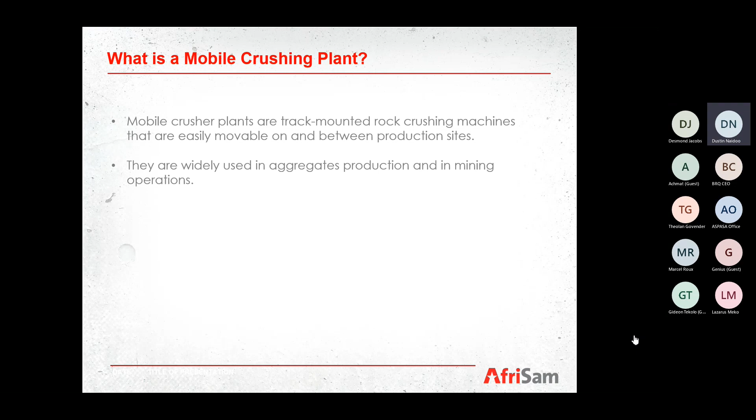Mobile crushing plants are track-mounted rock crushing machines that are easily movable on and between sites. These machines run on tracks similar to excavators, and can easily be moved around a site and between sites if needed for other operations. They are widely used in aggregate production and mining operations. Mobile crushers can replace stationary crushing systems, which reduces the need for hauling and thus cuts operational costs.

What that means is if your quarry pit allows it, you can have your mobile plant set up into the pit itself and not have to haul material from the quarry pit to the operating area. Mobile crusher plants are typically powered by hydraulic systems, where hydraulic pumps are driven and coupled to a diesel engine, which then runs the rest of the units.

Let's look at some of the units typically used in the plants or in the process. Some units are electrically powered, relying on external electrical power from a mobile generator.

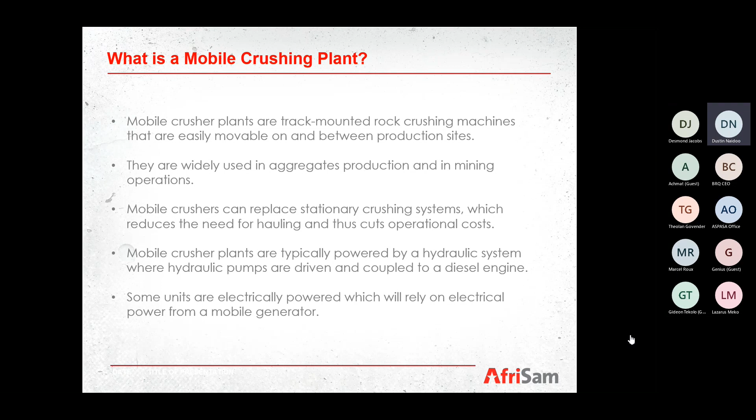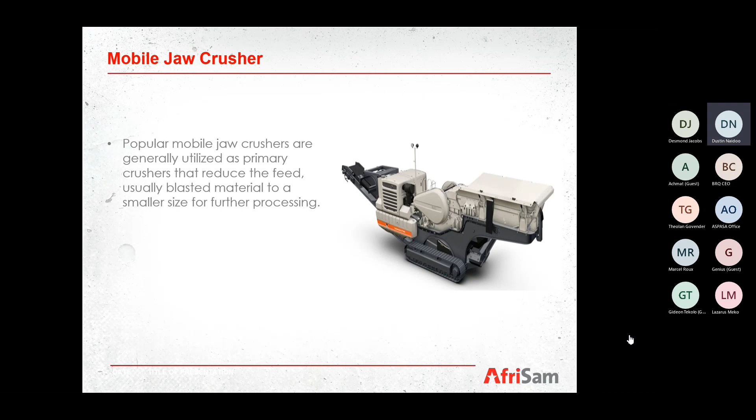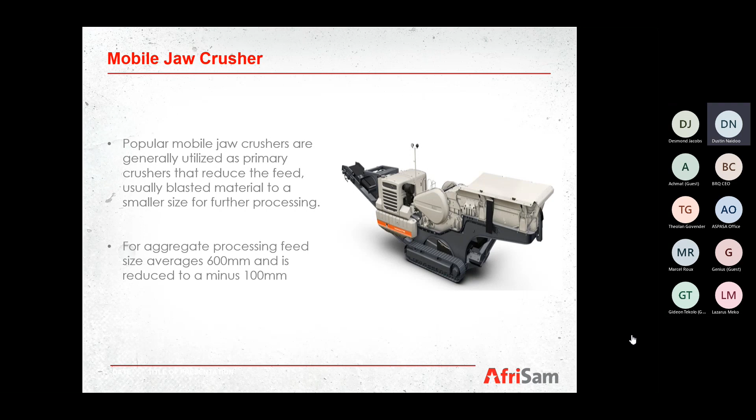Looking at the units available, at the beginning, in your primary side of the process, you have a mobile jaw crusher. Popular mobile jaw crushers are generally utilized as primary crushers that reduce the feed, usually blasted size material, to a smaller size for further processing. For aggregate processing, feed size averages 600 millimeters and is reduced to a size of minus 100 millimeters.

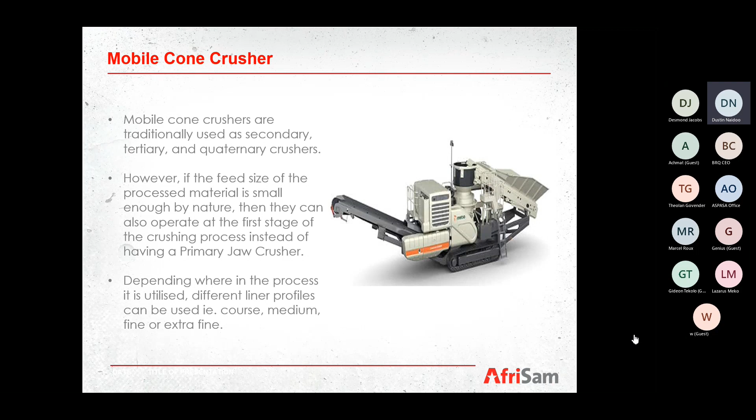Usually in front of that, we'll have a mobile cone crusher. Mobile cone crushers are traditionally used as secondary, tertiary, or quaternary crushers. However, if the feed size of the processed material is small enough by nature, they can operate at the first stage of the crushing process instead of having a primary jaw. Depending on where in the process it's utilized, different liner profiles can be used - coarse, medium, fine, or extra fine - depending on the specification of the material required.

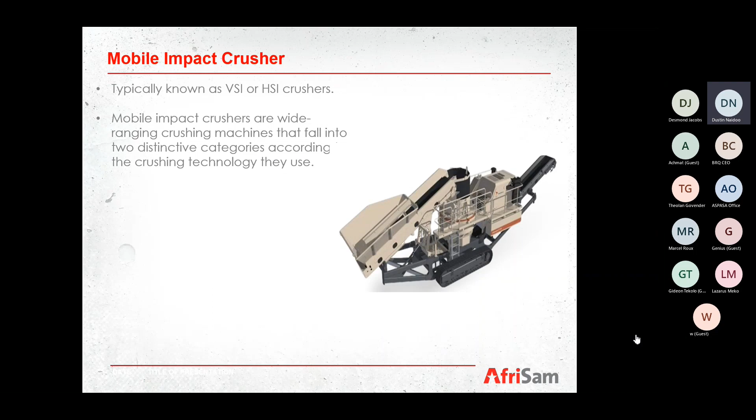Next up, we have a mobile impact crusher, typically known in the market or industry as HSI or VSI crushers. Mobile impact crushers are wide-ranging crushing machines that fall into two distinctive categories according to the crushing technology they use: mobile HSI crushers, having a horizontal impact crushing unit, used as primary, secondary, tertiary, or quaternary crushers; and mobile VSI crushers, equipped with a vertical shaft impact crushing unit, extremely efficient in the last stage of the crushing process, precisely shaping products by reducing the flakiness index.

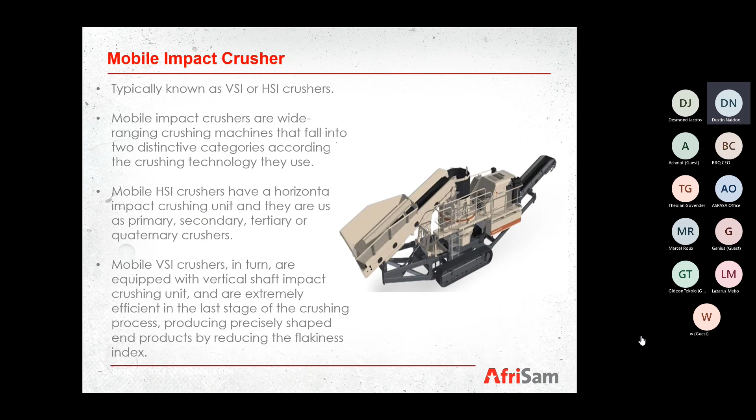Next, we have mobile screening plants.

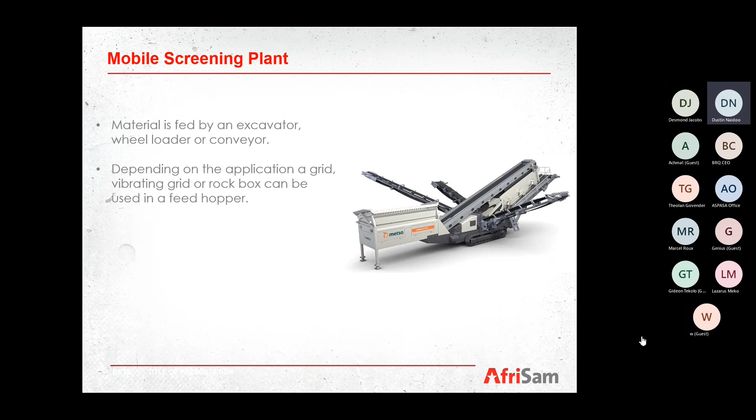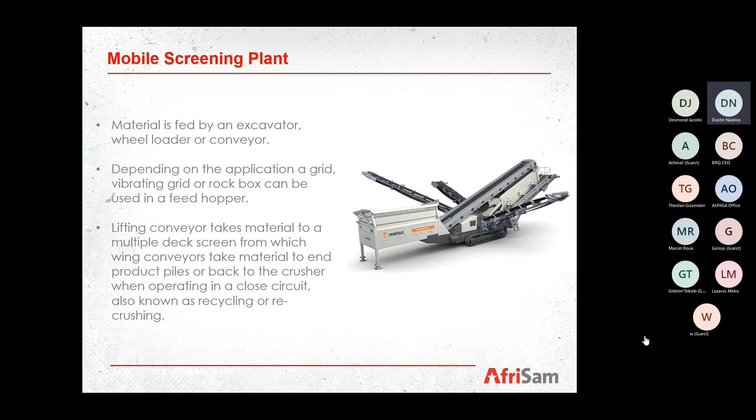Material is fed by an excavator, wheel loader, or a conveyor if used in the full train. Depending on the application, a grid, vibrating grid, or rock box can be used in a feed hopper where material is fed into. The lifting conveyor then takes material to a multiple deck screen from which wing conveyors take material to end product piles or back to the crusher when operating in a closed circuit, typically also known as recycling or recrushing.

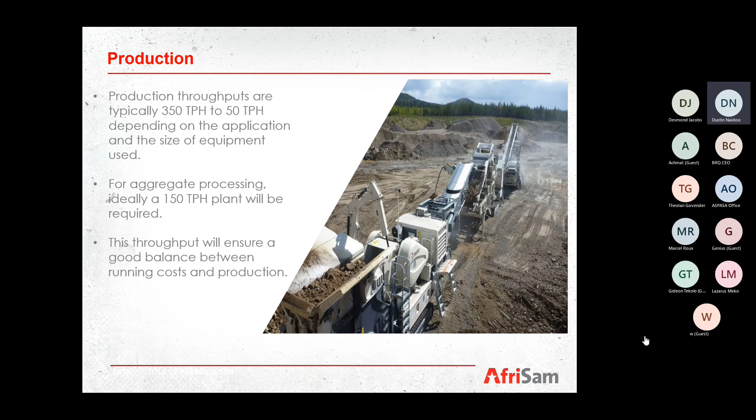Okay, if we're looking at our plant in a process, production throughputs are typically 350 tons per hour to 50 tons per hour, depending on the application and the size of equipment used. For aggregate processing, ideally a 150 ton per hour plant will be required, and this throughput gives a good balance between running costs and production. So let's look at a production setup for an aggregate processing operation.

We'll look at 5 aggregate products that will be produced: the 28 millimeter concrete, 20 millimeter concrete, 14 millimeter concrete, 10 millimeter concrete, and lastly a 7.1 millimeter crusher sand. At the beginning of the process, we'll have a jaw crusher, and its application will be primary crushing.

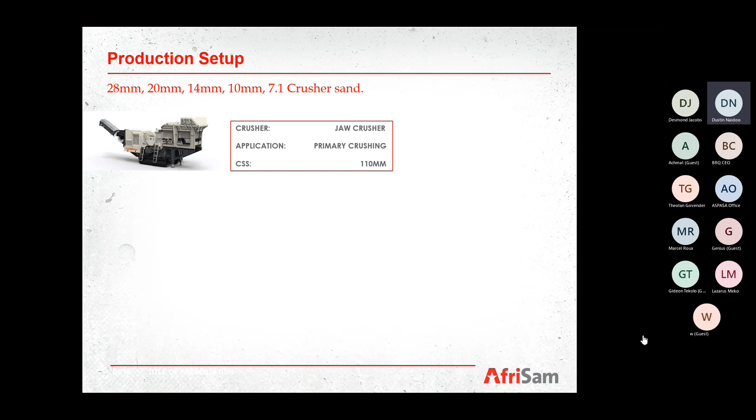The closed side setting on the jaw will be set to typically 110 or 100 millimeters. In front of that, we'll have a cone crusher. Application there will be secondary crushing, and your closed side setting on the cone, which is your gap, will be 30 millimeters.

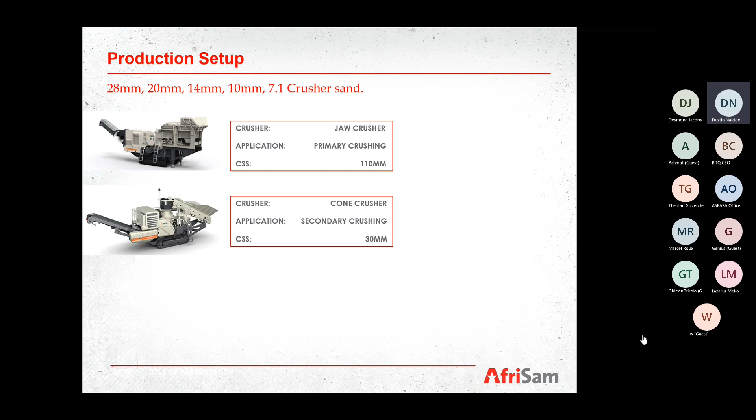In front of that, we can have a unit that has a screen and a crusher combined on it. The crusher used there is a gyratory crusher, and the screen is a triple deck screen. The application will be tertiary crushing and screening. The closed side setting on the gyratory crusher can be set at 20 millimeters, and your screen media setup on your screens will be as follows: top deck 32 millimeters, middle deck 22 millimeters, bottom deck 16 millimeters.

Going back to your 32 millimeter setup, everything over 32 millimeters will be oversized and go back into your gyratory crusher as recycle, and everything passing through there will take out your 28 millimeter. On your middle deck, where you've got a 22 millimeter media, that will take out your 20 millimeter product, and your 16 millimeter will take out your 14 millimeter concrete stone product.

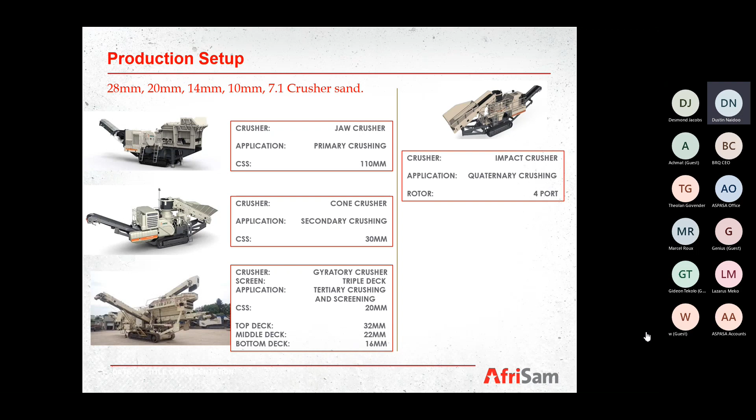In front of that, if your material requires shaping, then you can have an impact crusher. There's not much settings on there - it'll just be an impact crusher, and the application will be quaternary crushing, typically used for shaping. You have different rotors that are used there, and typically in this application we'll use a 4-port rotor.

Lastly, at the end of the process, you'll have a double deck screen, and the application there will be screening. On your top deck, you'll have 12 millimeter, and at the top of that we'll take out your 14 millimeter stone. The bottom deck will have 8 millimeter, which will take off your 10 millimeter concrete, and everything else passing through there will be your 7.1 millimeter crusher sand.

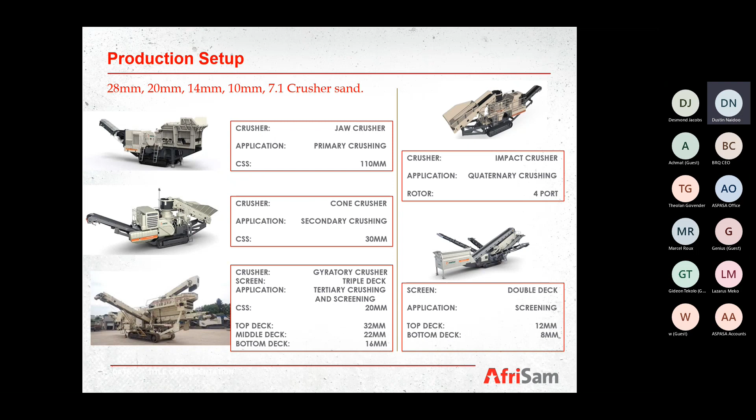Okay, now we'll look at our production throughputs, looking at the same 5 products being produced in the process. Our 28mm concrete will come out with that setup at 35 tons per hour. Our 20mm concrete will come out at 40 tons per hour. Our 14mm concrete will come out at 20 tons per hour. 10mm concrete at 20 tons per hour, and 7.1 crusher sand at 35 tons per hour.

And like I said at the beginning, a 150 ton per hour plant will be suitable for your operation. If you're looking at your tonnage per shift, you'll get a total tonnage of 945 tons per shift and 20,790 tons per month. These figures are calculated on a 9-hour shift with 70% productivity over 22 production days per month.

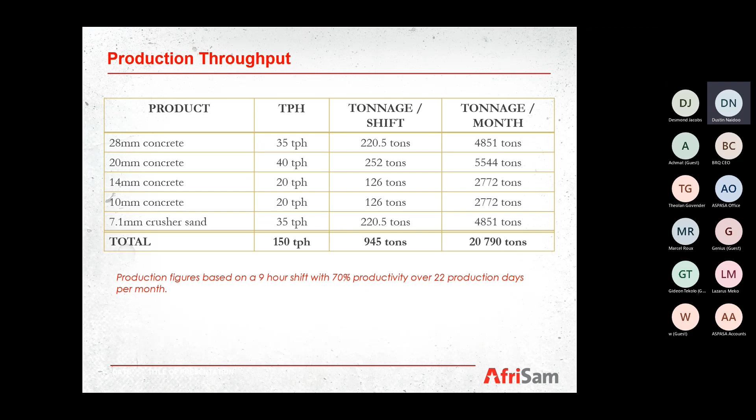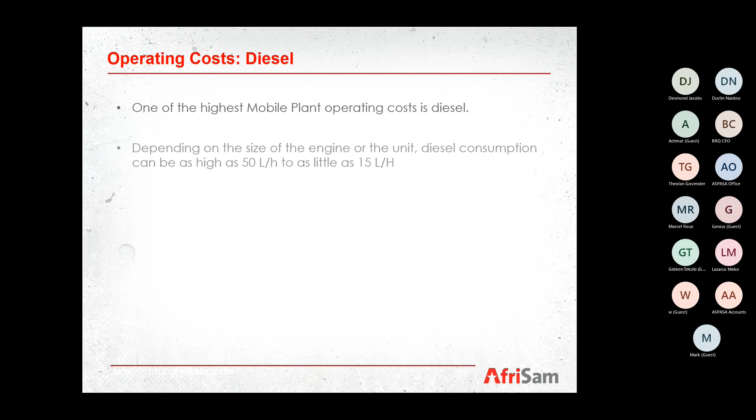Okay, next we will look at our operating costs, and I'm going to look at diesel specifically because it is one of the highest costs whilst running a mobile plant because it is engine driven. One of the highest mobile plant operating costs is diesel. Depending on the size of the engine or the unit, diesel consumption can be as high as 50 liters an hour to as little as 15 liters per hour.

So what does this exactly mean in rands? Let's have a look.

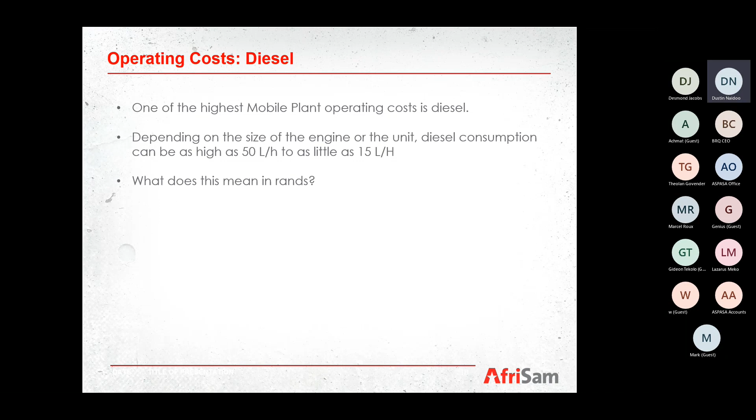Our diesel consumption in liters: our jaw crusher, shown in red, typically uses 30 liters per hour. Our cone crusher uses 25 liters per hour, and our gyratory at 35 liters per hour. Our VSI uses 36 liters per hour, and our screening is a bit low at 16 liters per hour because there isn't much high-powered equipment on that apart from the screen itself.

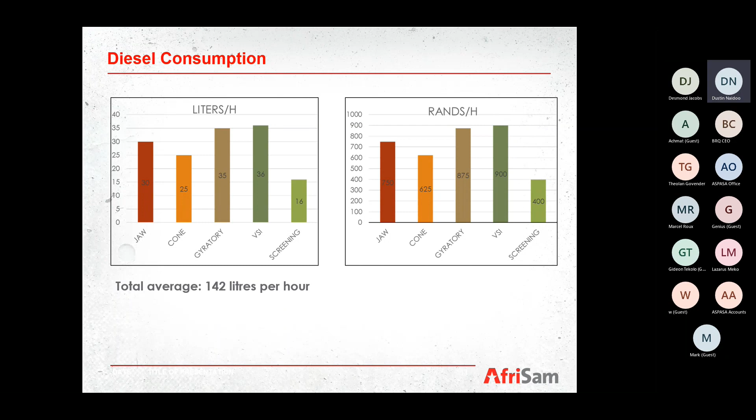This gives you a total average of 142 liters per hour, and converting that to rands: the jaw at 750 rand per hour, cone at 625 rand per hour, gyratory crusher at 875 rand per hour, VSI at 900 rand per hour, and screening at 400 rand per hour. This gives a total average of 3,550 rand per hour.

And I think it's at this point where we start asking ourselves whether we want to go ahead and get a mobile plant, or whether the cost will be too high. So let's look at our other operating costs for the plant.

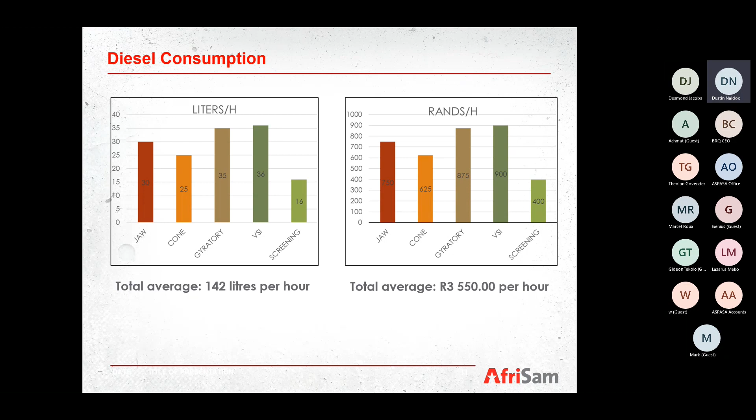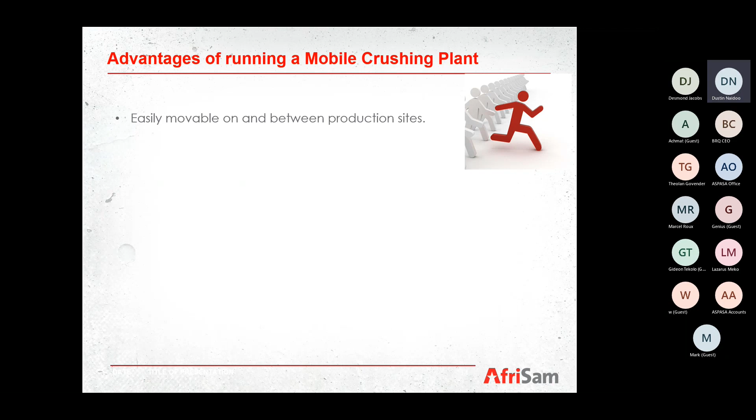So let's look at the advantages of running a mobile crushing plant. Mobile crushing plants are easily movable on and between production sites. Setup is easy without the need for foundation work. And they continue to run during load shedding or other power outages, since the units are powered by diesel engines. Looking at our load shedding schedule in recent times, this is highly beneficial to an operation.

Each unit operates independently and can be combined with different units to operate in different modes instead of using all units at the same time. This means each unit can be set up with another unit, and instead of using all the units together, you can just use certain units in a train to give you your desired product outcome.

The transfer of material is more flexible and convenient, allowing you to set up the plants at different angles to reduce the amount of space used. This means your plants do not have to all be in a straight line - they can be set up at an angle, giving you a better working space and reducing the amount of space used on your operation.

And lastly, these plants are easy to operate. Most of them are fully automated, where just a push of a button starts your whole process, and a push of another button will stop your whole process. And setting up the plant is just as easy.

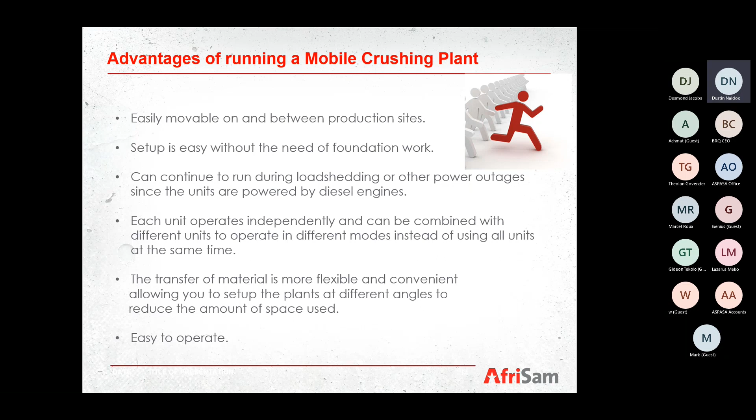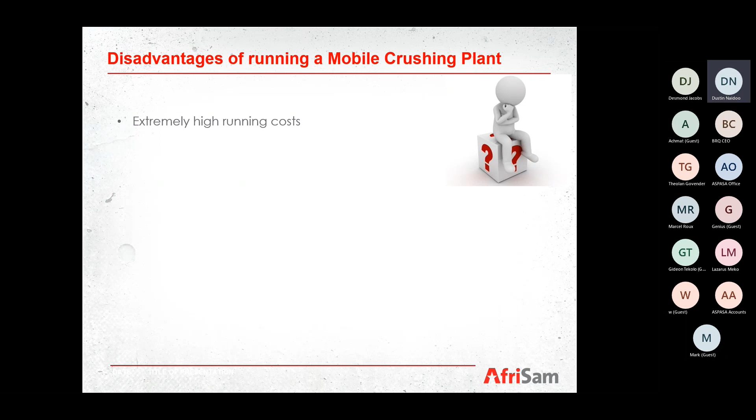Okay, let's look at the disadvantages of running a mobile crushing plant. Extremely high running costs, as we have seen. They are prone to breakdowns due to numerous driving systems, that is engines, hydraulics, and electrical. With experience, hydraulics is the worst because your entire machine is hydraulically driven. You've got numerous hydraulic pipes, numerous valves, and pumps on a system. So your hydraulics becomes your main Achilles heel in your operation. So these has to be maintained properly.

Another disadvantage is that some spares are not available off the shelf and can lead to massive downtime and production losses when a breakdown occurs. Sometimes a small breakdown as simple as a bearing can make you stand for days due to the type of spares not being available off the shelf or aftermarket.

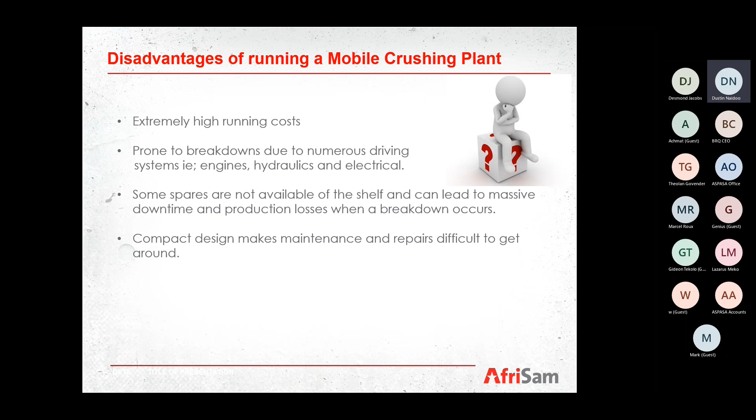The compact design of the plant makes maintenance and repairs difficult to get around. Space is tight on the plant, so it takes a while to get maintenance done because you have to work through the space and work with what is available on the plant.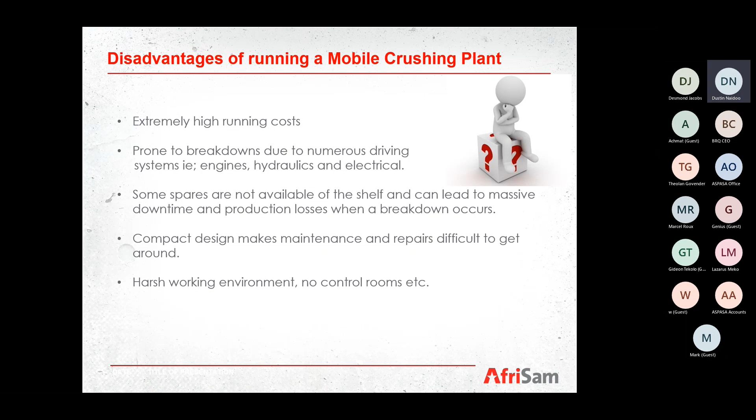Okay, lastly, it's a harsh working environment. There's no control rooms or operating centers like some of your fixed plants have, so you're out there exposed to the elements, and that makes it unpleasant at times to work around.

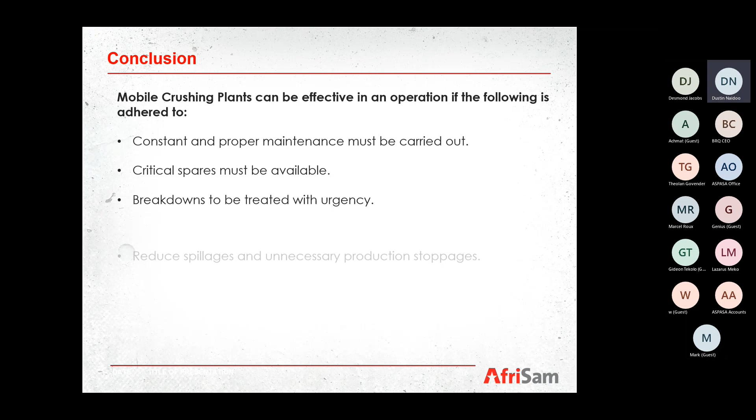In conclusion, mobile crushing plants can be effective in an operation if the following is adhered to. Constant and proper maintenance must be carried out. Critical spares must be available. Breakdowns to be treated with urgency. Reduce spillages and unnecessary production stoppages. Have a motivated team who will ensure production targets are met and the plant is maintained to the best operating standards. Constant plant and process supervision to ensure material of superior quality is produced. And lastly, and I think most importantly, is proper planning and budgeting whilst running this plant.

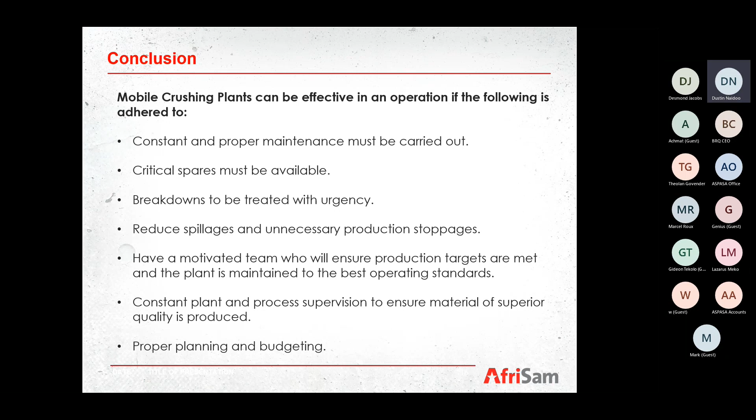Thank you for that, Dustin. So Dustin, our maintenance team leader, in charge of our mobiles. I think we've had quite a run with these mobiles, especially all the equipment, and it's quite fitting to bring that aboard, especially when you look from an industry perspective and where some of the work is going.

And trying to chase for the class 1 and class 2 products. Yeah, it's really gone well from our end, just having the right knowledge, right backing from an OEM perspective and making these mobiles work. Thanks again, Dustin. Thanks, Theolan. Okay.

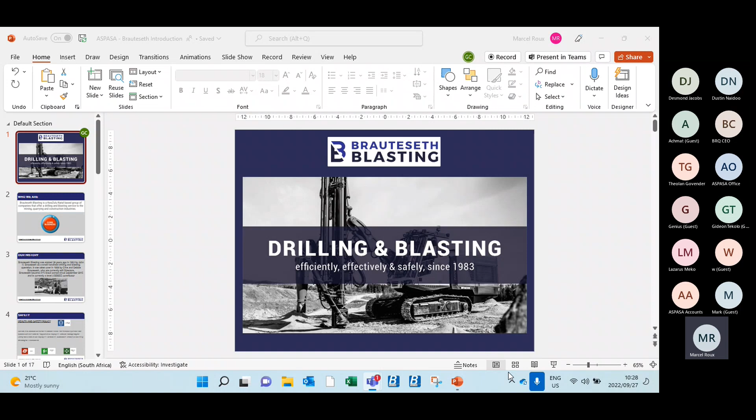Thanks. Excellent. So who is Brauteseth Blasting? We are a KwaZulu-Natal based group of companies, offering drilling and blasting services as our core business to the mining, quarrying and construction industry. Brauteseth Blasting was started 39 years ago in 1983 by John H. Brauteseth, beginning as a small handheld drilling and blasting operation. It was then taken over by current directors Clive and Debbie Brauteseth in 1989, and we're heading for our 40-year anniversary next year. During September 2015, we became 51% Black owned, and we are currently a level 2 broad-based Black economic empowerment contributor.

Safety: our aim is always to conduct our business and activities in the safest manner possible. We commit ourselves, along with all our employees, to not endangering the safety and health of our employees, customers, contractors, visitors, or affecting the environment in which we operate, which is pretty difficult if you're a blasting company because you're supposed to make holes, but we try our best.

Our target customers are usually in mining, quarry services, civils and construction. As Dustin pointed out in his slideshow, with drilling and blasting being the second highest cost, you want to know what you pay for as a client. As Brauteseth Blasting, we pride ourselves on safety, productivity and efficiency, which leads to peace of mind for the customer. Why do clients choose us?

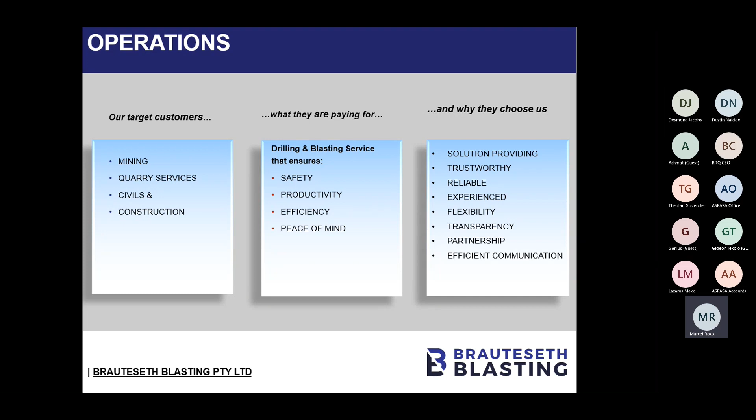Transparency again ties to trustworthiness - you need to be transparent. Sometimes the news you haven't heard might be the worst news, so the sooner you get it out, the better for both parties. We believe each and every relationship is a partnership with our suppliers and clients, and through efficient communication, we believe all challenges become opportunities.

We've got three divisions: mining, quarries, and civils and construction. In our mining division, we currently operate the phosphate mine in Limpopo that we've been working since 2020. We also have an anthracite mine. Just something here with the power and load shedding.

Hi, Marcel. Hi, Theolan, am I back on again? Yeah, you're on. Sorry, the power dipped, I think we lost you there. Your presentation - I'm going to quickly get it on again. It's one of Dustin's ideas why mobile crushers don't get affected by load shedding.

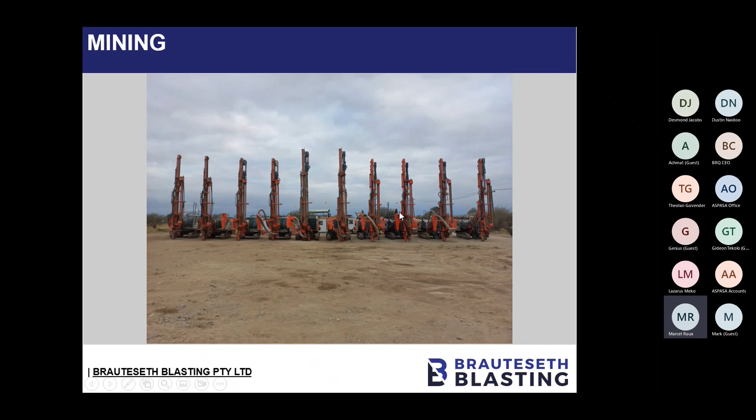All right, sorry for that, ladies and gentlemen. As I said, our mining division currently operates on a phosphate mine in Limpopo, doing the whole drilling and blasting operation since 2020. We further operate on an anthracite mine in KZN since 2009, also drilling and blasting. We also operate 3 limestone mines in the drilling and blasting program, since 2001, 2011 and 2015 respectively.

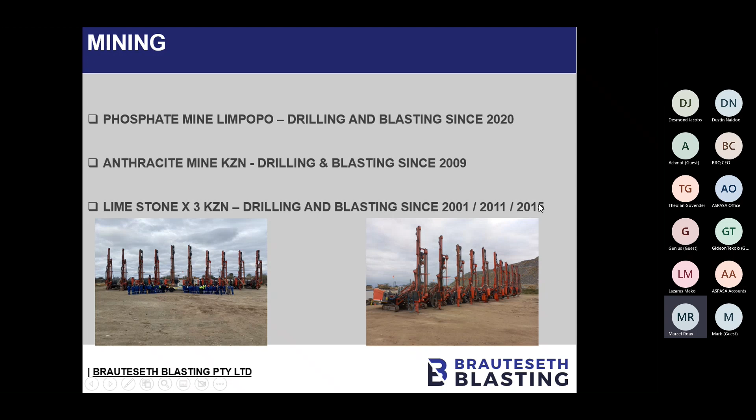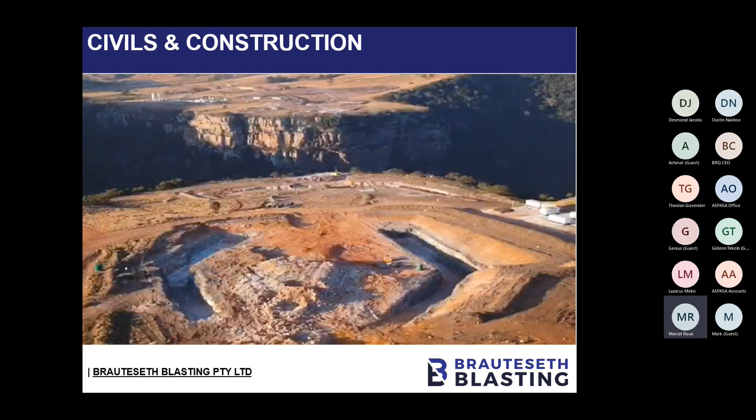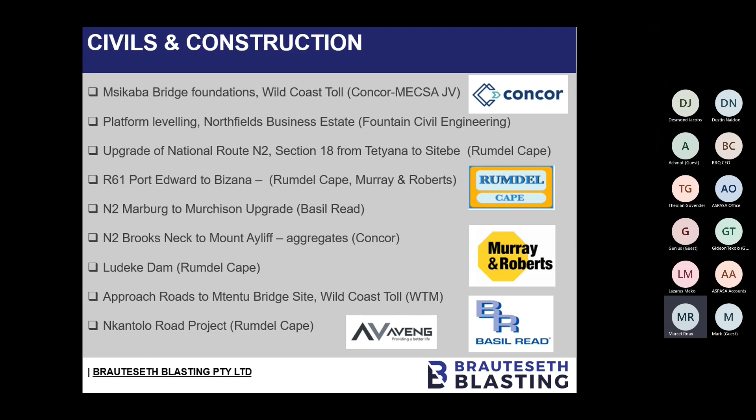Our civils and construction department - the photo there is the most recent project we did, the Msikaba Bridge for the SANRAL project on the N2 Wild Coast. I've noted a few previous projects we've dealt with and some clients we've handled: the Msikaba Bridge with Concor-MECSA, platform leveling at the Northfields Business Estate for Fountain Civil Engineering, road upgrades and alignments for the likes of Rumdel, Murray & Roberts, Aveng, Basil Read, the Ludeke Dam, approach roads to the Mtentu Bridge site, and other projects like the Nkantolo Road project.

Our equipment and resources: we currently run a fleet of 23 drill rigs, top hammer and DTH, spread around South Africa. We also operate 5 excavators between the 20 to 50 ton ranges that work with hydraulic rock breakers. We've got our own MMU explosive trucks that we use along with auxiliary equipment to support our functions in the field. We operate about 40 LDV units.

We also have our own fixed and mobile explosive magazines that can be set up anywhere we start operations, on a large scale or for existing operations, supporting us to ensure not just that stock supply from external suppliers doesn't affect us, but that our client operations continue even when we see the effects of load shedding or strikes on the road. We always try to establish our own stock on hand.

Further to that, as Dustin mentioned, a part of any plant hire or equipment running, you need a good team that maintains your equipment along with parts. That's something we pride ourselves on, having an in-house maintenance department as well as our own parts procurement, where we also support a lot of local entities.

Our people, obviously the heart of the business. We are currently 185 employees within the broader Brauteseth Group, spread across the 3 different divisions of mining, quarries, and civils. We believe in leadership development, internal career growth, teamwork, learnerships and apprenticeships taking a lot more form, and we also believe in having fun doing all of this.

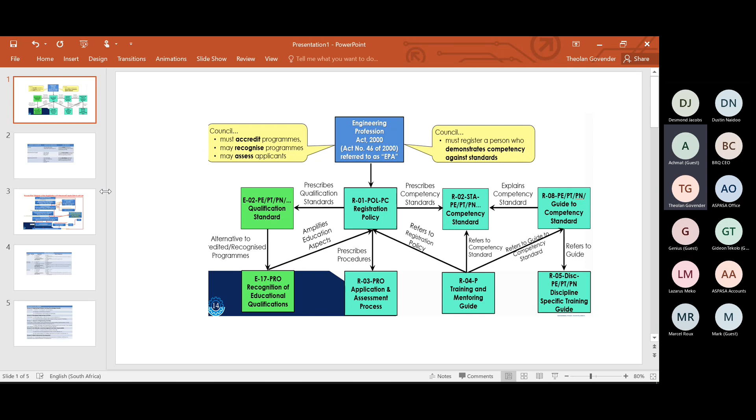Sorry, your screen is black on my side. Can you see it now? Yes, yes, apologies for that. I do have a problem on my end, but let me just run it in this format.

So as I said, the Engineering Profession Act 2000 states the council will register persons who demonstrate effective competency against the standards set out. So for a lot of the youngsters here working towards a professional qualification, it's all governed against the registration policy.

If you go onto the ECSA website, you'll find R-01-POL-PC in terms of the general policy. This policy is made up of a few areas where we have a qualification standard. I'll quickly take you all through that.

The recognition of educational qualifications includes your recognition of prior learning, which we call the alternative route. Then we have the application and assessment process, which is basically the forms or process in which you complete the documentation for the steps of assessment.

It also gives guidance in terms of training and mentoring through the different facets or disciplines, as well as laying the competency standard against those disciplines. So an electrical engineer across the different facets is not just an electrical engineer.

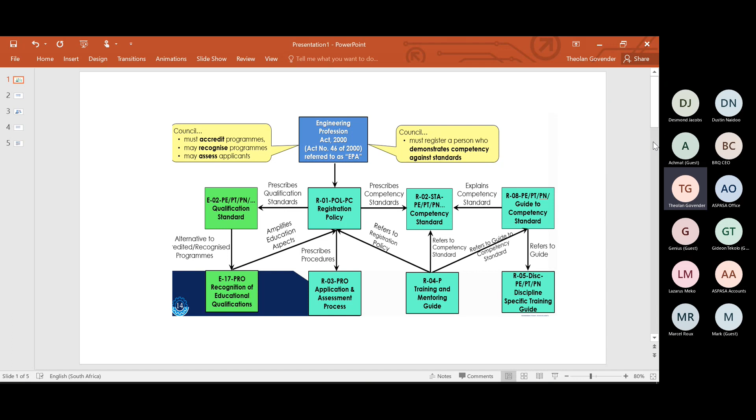And lastly, the discipline-specific guide training. So all in all, it's supportive of the registration process, and it's well prepped in terms of aspiring engineers reaching their qualification. In a nutshell, there are specifically 3 types of registrations.

So first would be the engineer. If you have a qualification, a BSc, BEng as a minimum, or the new MEng qualification, that is the PR-Eng path.

About 2 years back, that is made up - you come through the BEng Tech route, then do your BEng Tech honors or postgrad diploma in engineering, and then you can work through your MEng. So it's not your normal masters, it's the new masters with changes made by the universities.

And this will give you a PR-Eng qualification, solving complex problems.

For the engineering technologist, you would look at the new advanced diploma in engineering, or the old BTech engineering qualification, or the new BEng Tech qualification. You become a technologist and you would be solving broadly defined engineering problems.

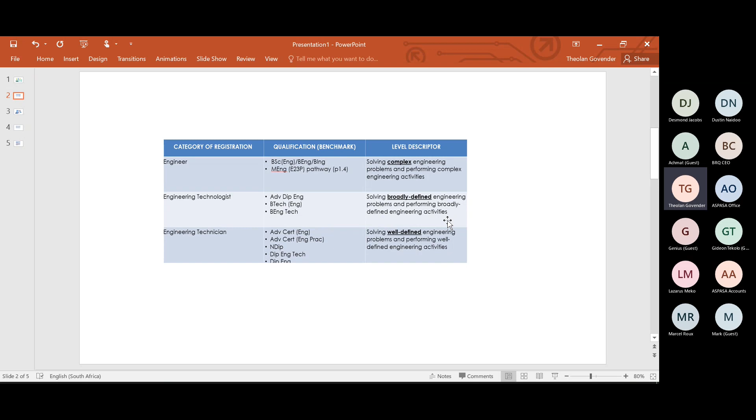And lastly, on the engineering technician status, this would be your old national diploma, or a newer diploma in engineering technician, or your advanced certificate in engineering. You would be solving well-defined projects.

So the process flow with ECSA - I spoke about the registration application process. Once you submit your documentation, it's a stringent process through ECSA, where there's an administration process and an experience appraisal, where your forms would be looked at. That process would be looked at by at least 4 registered professional engineers, marked on the 11 outcomes.

That would thereafter move to moderation. The 3+ CI is if you get 3 competence indicated, that's what CI means, you would either go up straight to professional review after moderation, but if you get 2 or more competence not demonstrated, the process will push you back.

This is either to an interview so they can get clarity on your application on specific outcomes from the 11 where you've been marked by the 4 registered persons, or you'd be kept in abeyance, meaning you're not really ready and may need up to a year to get more exposure in line with the competency standard. If you're in abeyance, the process starts again.

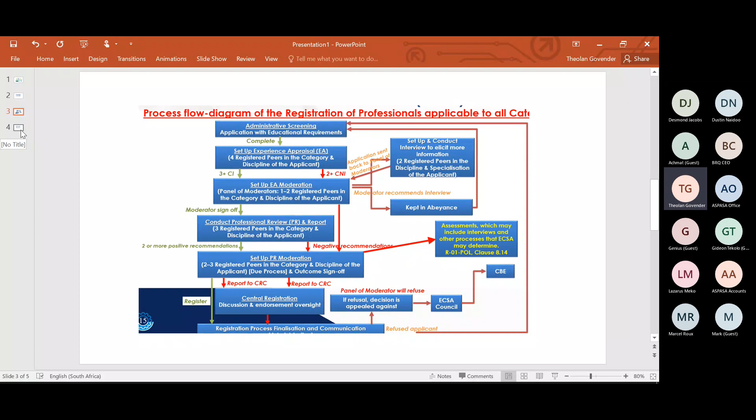In a nutshell, registration is only as good as the work that is put in against the competency standard. As I mentioned to most youngsters or aspiring engineers coming through, it's very important to follow the policies put through ECSA and attain the relevant exposure in order to attain those qualifications.

What's very important from a mentoring and coaching perspective, if you're going for the engineer route, you need to have at least 1 PR-Eng. It's three professionals, but one needs to be a PR-Eng, and the other can make up a certificated engineer or PR Tech Eng technologist. You have to have a supervisor, but this is the order of preference.

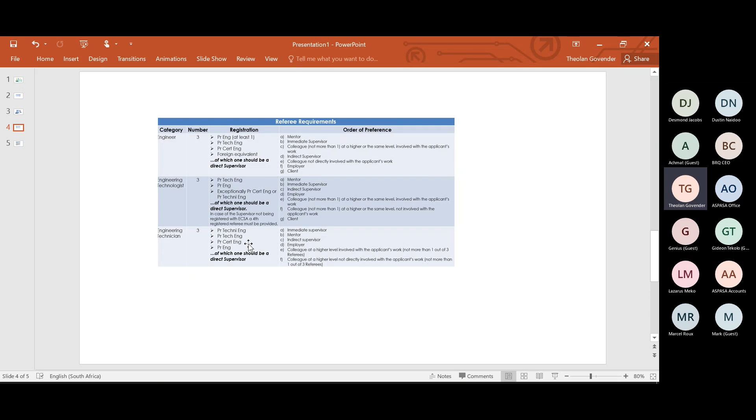With all your application, there must be an immediate supervisor that can witness and sign off in terms of your TER reports, training experience reports. So technology is the same, but the PR tech eng must be on there in a PR or PR eng, one of them being your direct supervisor, same format, same with the engineering technician. So a technician, you end up as a PR techni eng, but a sign-off will be needed at one of these categories.

Just finally, the outcomes that would be looked at, some of you may be familiar with it. It's grouped into A to E sections. The first outcome is defining, investigating, and analyzing the problem, then designing or developing a solution. A lot of students battle along this if the discipline specific complexity alignment to the competency standard is very important.

So if you're going for a PR eng or PR tech eng, you need to be operating at that level, utilizing your BTech eng or your BSc BEng studies to solve problems, whether it's from a design or development point of view. We noticed that not everyone is in a design field to design application, so some time back, ECSA changed it to design or develop solutions. Use it from first principle, they develop specific solutions in line with the registration discipline. Then comprehend and applied knowledge, that is the applications utilized from first principles or subjects utilized in order to sort those problems out.

So group B is basically from a project management and communication point of view. Group C is from a social, environmental, and cultural point of view, as well as utilizing the relevant laws, bylaws, and as well as your technical laws to solve these problems. So if you were an electrical engineer, you'd use specific parts of SANS, South African National Standards. Also, maybe you use specific mine health and safety standards.